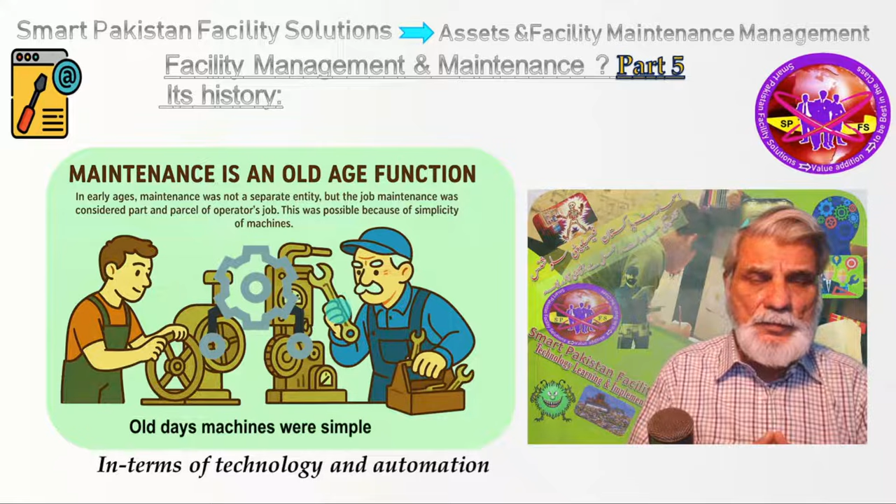Both operation and maintenance responsibilities were done by machine operators, and this was possible because of the simplicity of the machine, both in terms of the technology and automation. The early days automation usually consisted of relay logic or limit switches or a combination. That is why it was easy to operate and maintain.

Further, the old concept of maintenance was that maintenance is about preserving the facility and physical assets. Means the equipment or machines were kept running as long as possible. This is because if we look 6 to 7 decades back, technology was not as common as these days and was available with few countries only.

That is why the economical operation or the maintenance or the efficiency or the competency were not much of a considering factor, while all these factors are much in consideration for the success of any business these days.

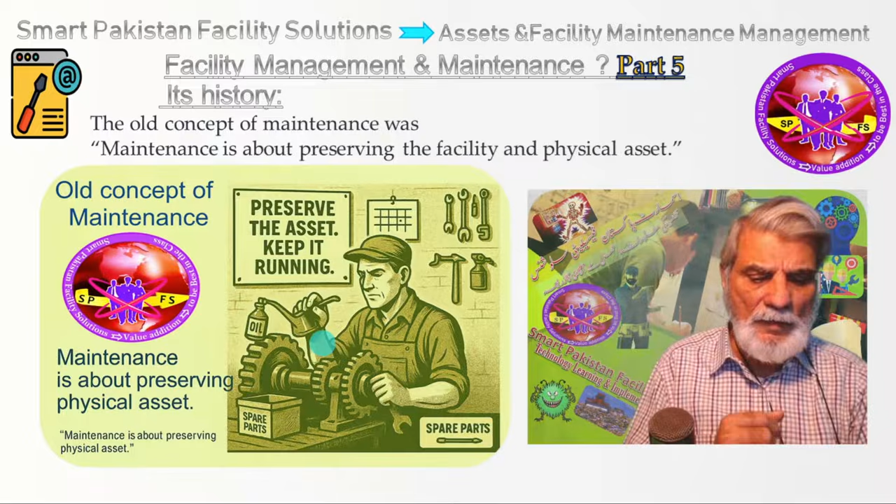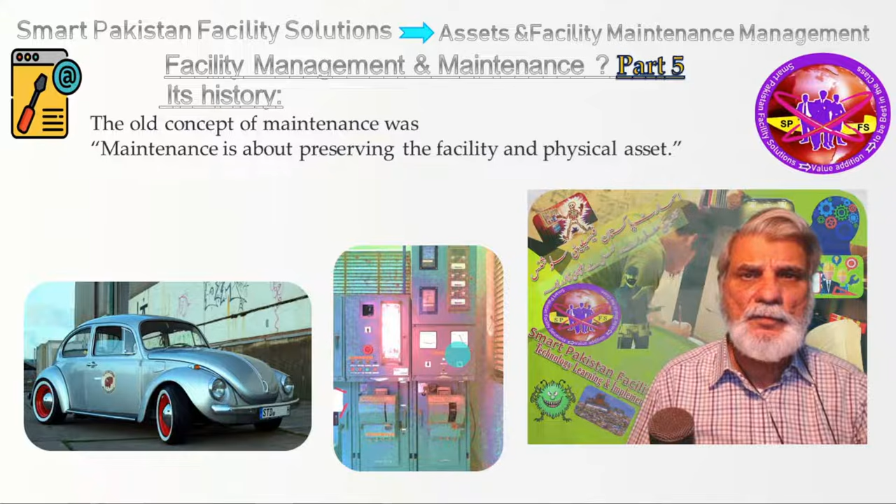These are the examples of two old machines: the Volkswagen Beetle model, and oil-filled HT switchgear of the electrical distribution system. These types of equipment are still easy to operate and maintain, but have costly operation and compromised safety. That is why these types of equipment were and are replaced with cost-efficient and safer equipment.

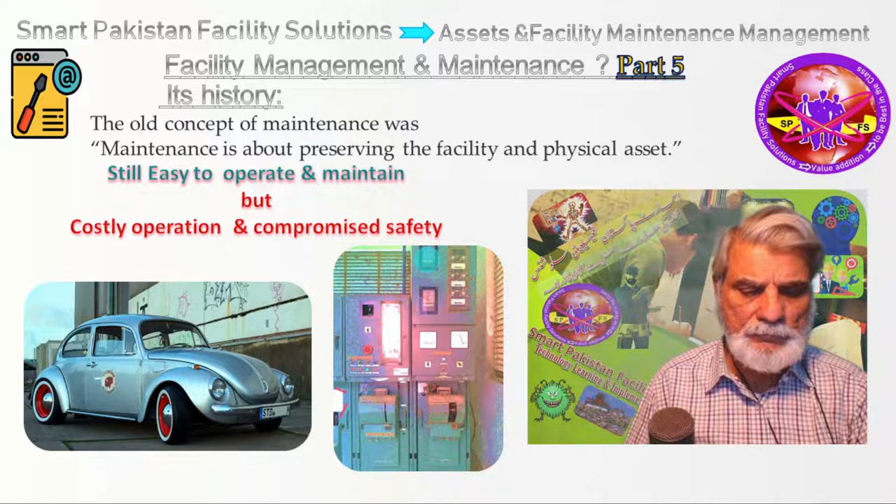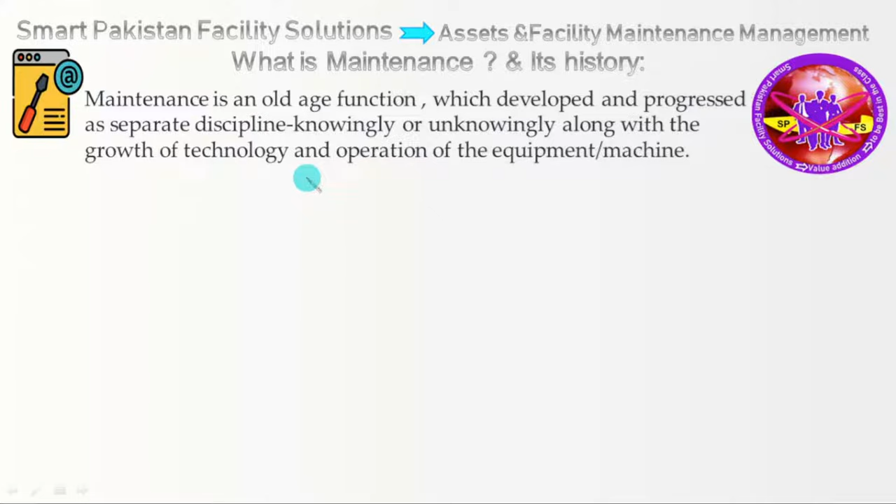As we know, maintenance is an old age function which developed and progressed as a separate discipline, knowingly or unknowingly, along with the growth of technology and operation of the equipment or the machine. If we take the example of this old generator, which was simple in construction and automation, anyone who had basic knowledge of this type of equipment was able to operate and maintain it.

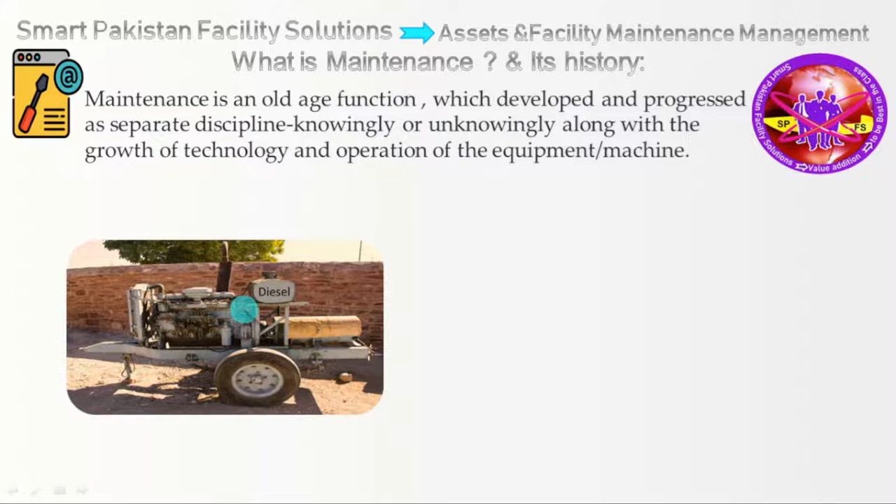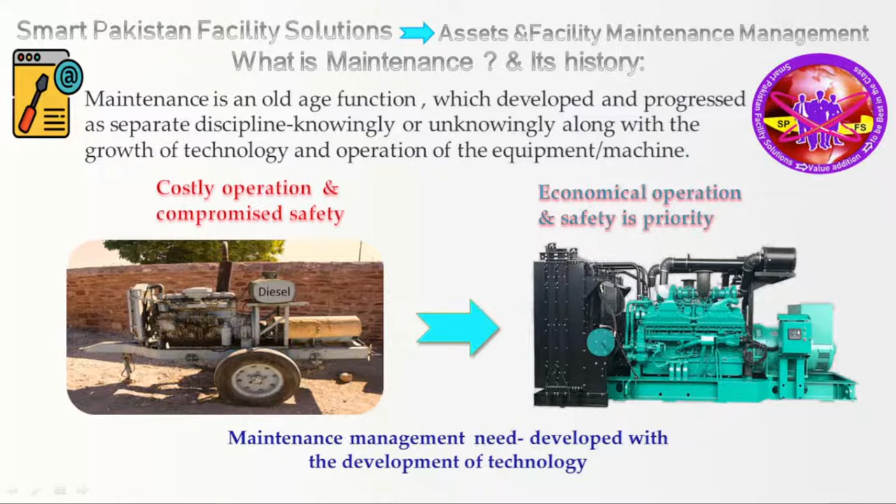Further, we take the example of these two models, the old one and the new one. The needed maintenance level is different due to modern automation and technology.

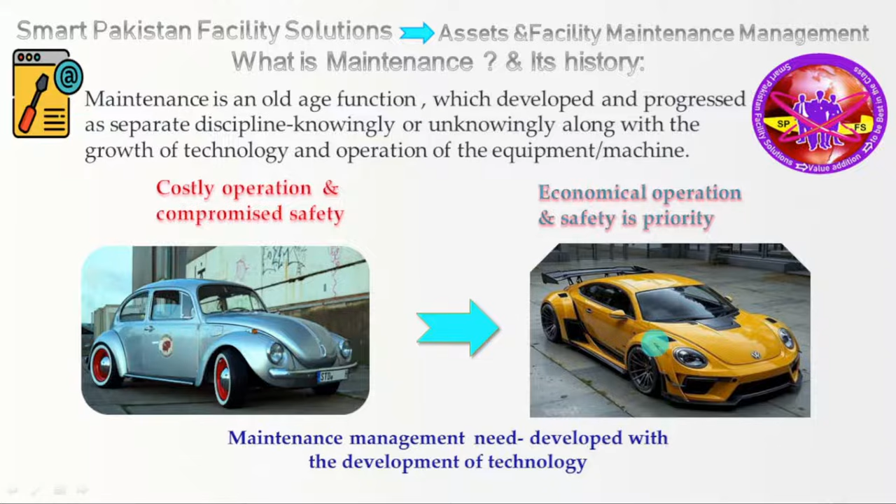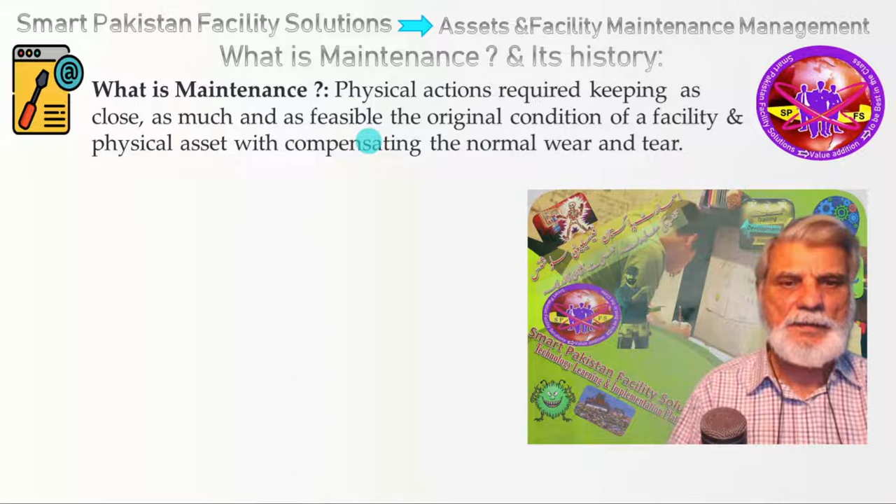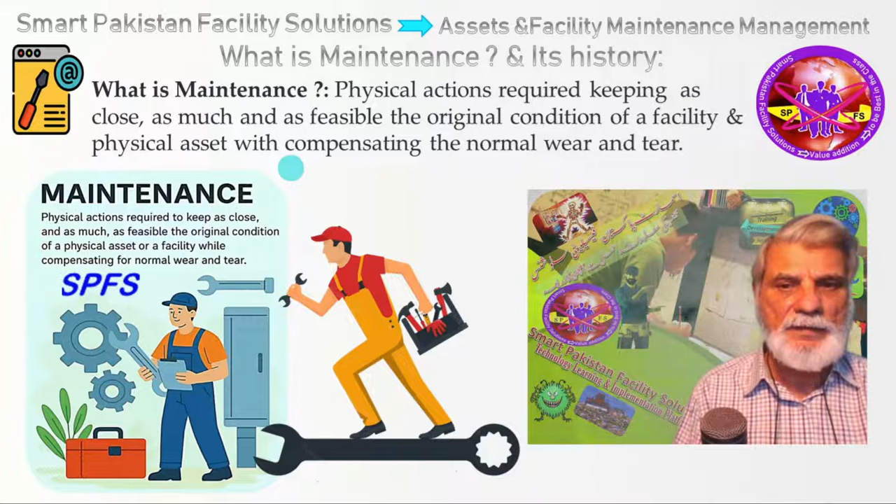Physical actions required for keeping, as close as feasible, the original condition of a facility and physical assets while compensating for normal wear and tear, or we can say the cost-effective adjustment of normal wear and tear, is maintenance. Due to complex technology, management for maintenance of physical assets is needed. Now we look at what management is.

What is management? Management is the process of working with people and resources to achieve organizational goals with efficient utilization of resources, that is, the best possible use of money, time, material and human resources.

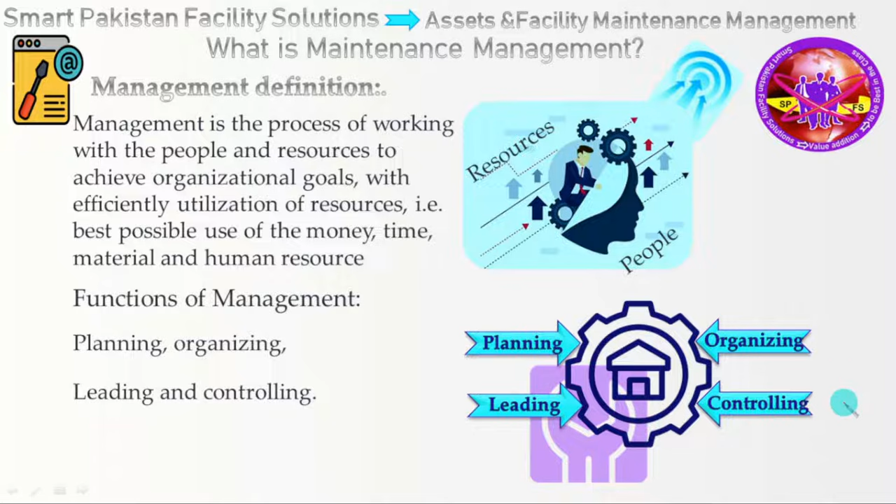What are the functions of management? There are four key functions: planning, organizing, leading and controlling. Now we look at a brief description of these functions with their contribution to continuous quality improvement.

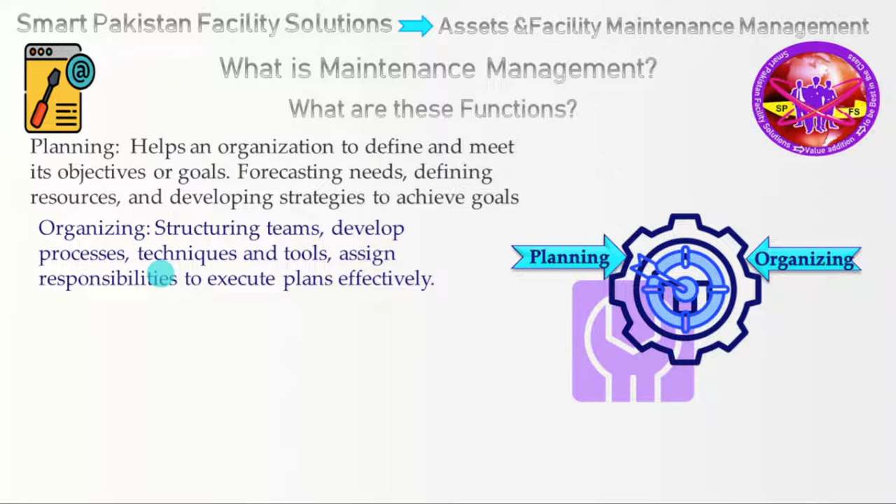Planning helps an organization to define and meet its objectives or goals, forecasting needs, defining resources, and developing strategies to achieve goals. Then organizing: structuring teams according to the goals, developing processes, techniques, and tools like policies, procedures, and measuring tools to gauge performance against goals, and assigning responsibilities to execute the plans effectively.

Then leading or leadership: inspiring human resources to unite, contribute willingly, and achieve goals with purpose and unity. And finally, controlling: monitoring progress, collecting data through measuring tools against the goal, and implementing necessary changes if required through 360-degree feedback to each corner of the process. That is how the controlling function makes sure that goals are achieved and a continuous quality improvement process takes place.

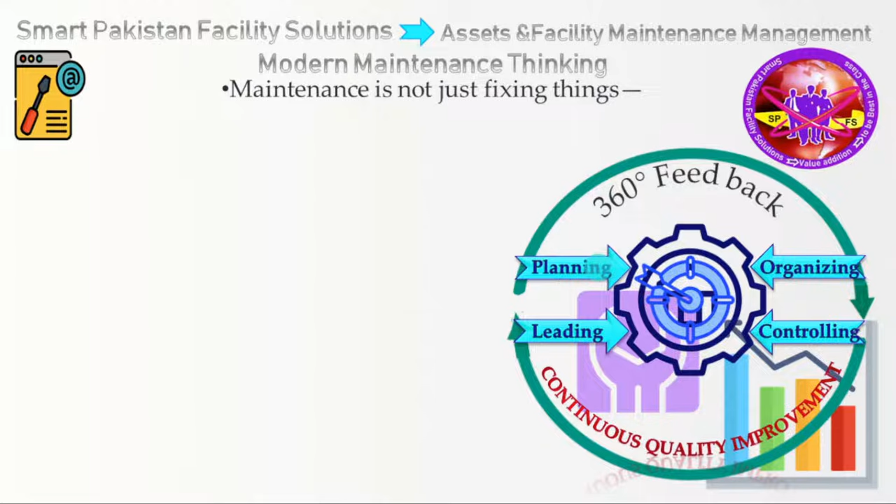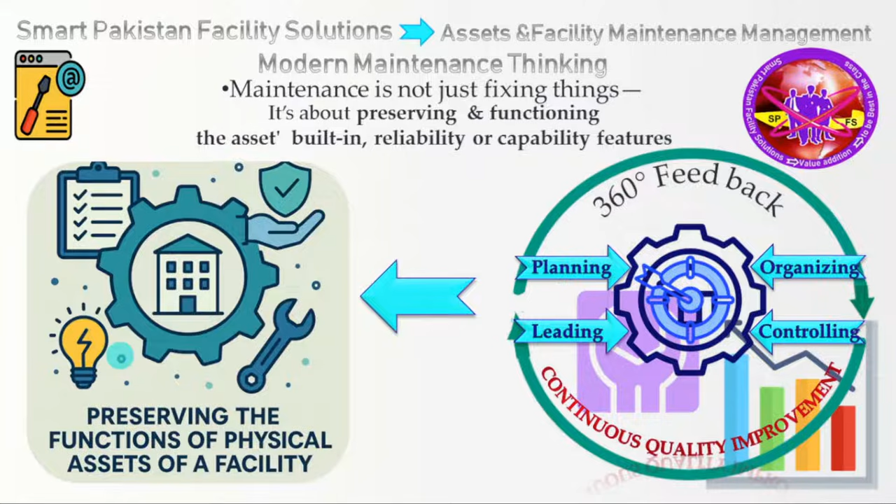In modern maintenance thinking, maintenance is not just fixing things, but it requires a comprehensive maintenance management plan, and it is also about preserving the functioning of the asset's built-in reliability and capability features, and today that is the need for the success of the business. Preserving the built-in reliability or capability of the physical assets is achieved through planning and organizing.

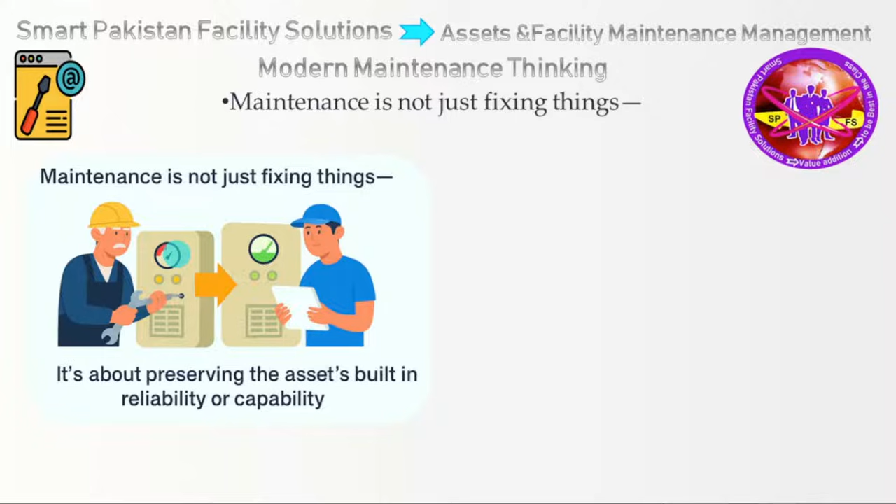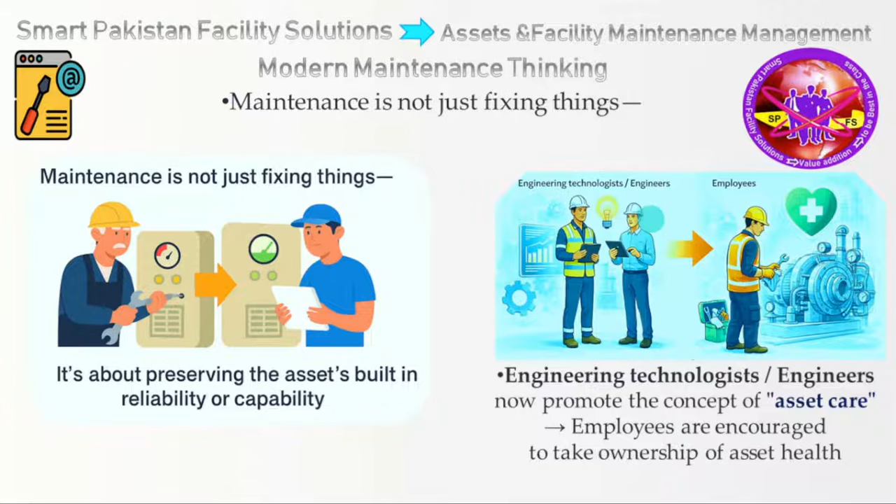Then engineering technologists or engineers now promote the concept of asset care, and employees are encouraged to take ownership of the asset, and this is the role of leading or leadership. Then the goal: keep assets doing what users need them to do, focus on the functions of the asset, not just its physical form, and that is the role of controlling. So that is how a comprehensive maintenance management system works.

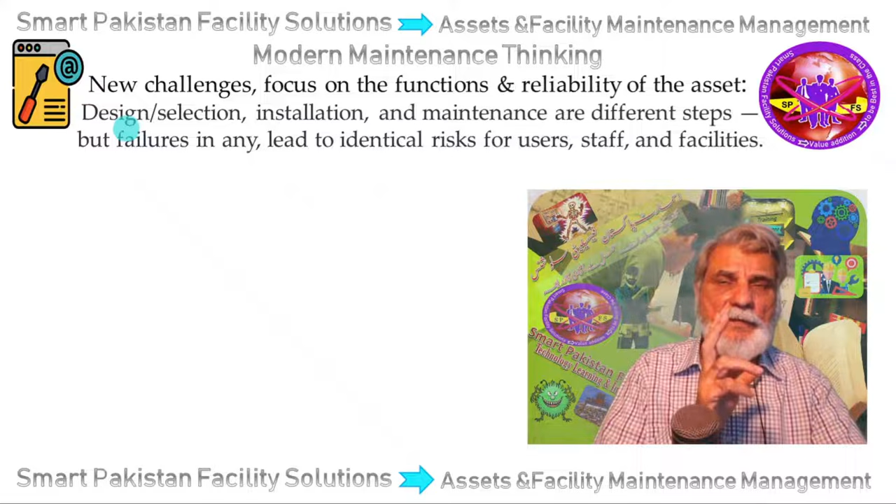In view of modern maintenance thinking, new challenges are to be focused on the functions and reliability of the assets, because design of the facility or selection of the equipment, installation and maintenance are different steps. But failure in any of these leads to identical risk for users, staff and facilities.

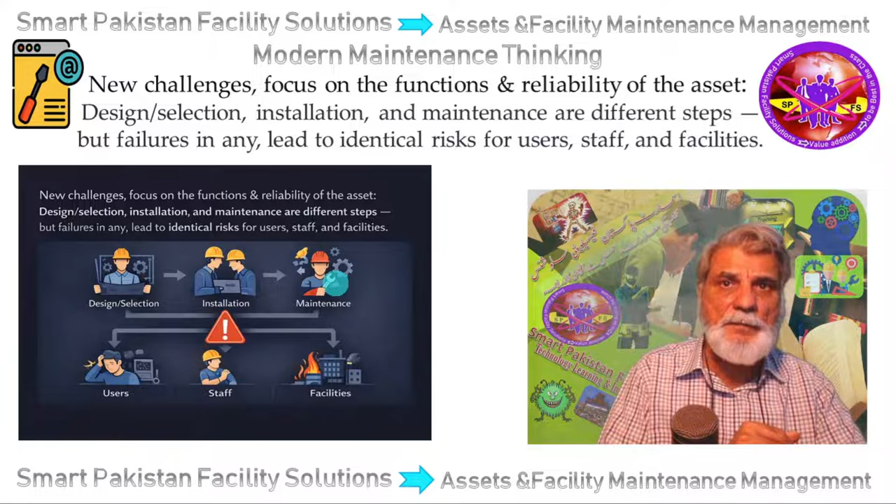Now we are concluding this part of the discussion. Our next discussion will start with the importance of proper execution of all these steps for the success of the business. Topics of our next discussion are common risks of gaps in any functions of asset reliability with examples, modernization and changing role of maintenance, maintenance management basic structure and its advantages for business success, and preparation for a shifted approach of maintenance.